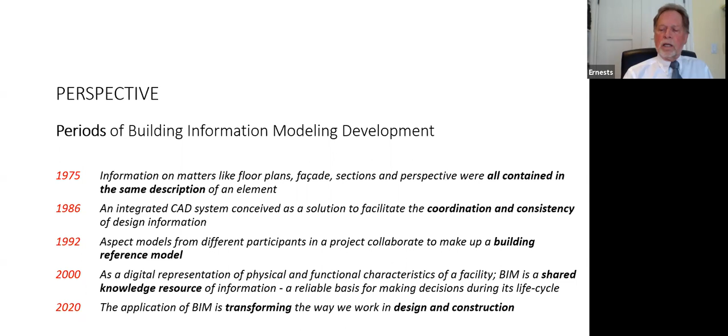Our own office staff at that point had Revit up on our computers. We were developing models of the projects we had in process, and for the first time we had shared knowledge, a resource of information, and a reliable basis for making decisions throughout the life cycle of the buildings we were designing. So by 2020, today, the application of BIM is transforming the way we work in design and construction.

Values again have to do with the benefits available in the world of virtual design and construction. Just to highlight a couple: quality control, focused identity of issues, alignment of documentation and models across disciplines, coordination between disciplines in a way never available to us before, and a whole different level of efficiency for project delivery.

Another value or benefit is the bringing forward of lean principles of construction. Again, decades past, these principles were established. They've been in action and application, improving workplace efficiency where applied.

There are five principles I wanted to highlight. They have names for each, but the first is defining value, which really focuses on what the customer wants, the common purpose - why are we here, what are we building, and how can we bring the greatest value to the process?

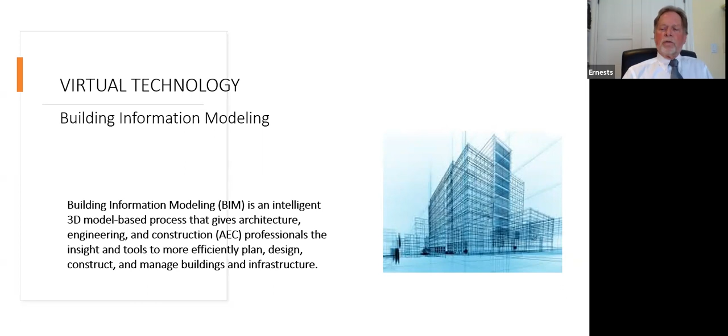This is a shift now from the values to the technology, and technology I call is really tools. One of the great tools we have developed and have available is building information modeling. What an incredible aspect of our modern world BIM has brought to us, with the invention and application of BIM as an intelligent three-dimensional model-based process that gives architecture, engineering, and construction professionals the insight and tools to more efficiently plan, design, construct, and manage buildings and infrastructure. It's just awesome, a delight and an opportunity we've never had available to us before in generations past.

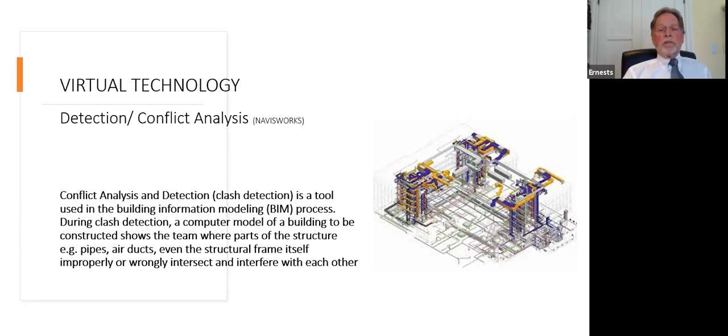Another one of the tools in our quiver now available is conflict analysis, where we can take apart the buildings and look at them in any range of possibilities we choose, and look clearly at how the mechanical system, the plumbing system, and the electrical systems are interfacing, and where a duct is going through a precast post-tension slab, and we can be very clear when there's any conflicts apparent in the virtual building model that we have available now. The computer-based model of the building shows the team players where parts of the structure itself will wrongly intersect and interfere with each other.

The other tool in our tool belt is simulation, which is stepping strongly into a 3- and 4-dimensional world, where the use of the computer to represent dynamic responses of one system by the behavior of another modeled system is significant, apparent, and available now like never before.

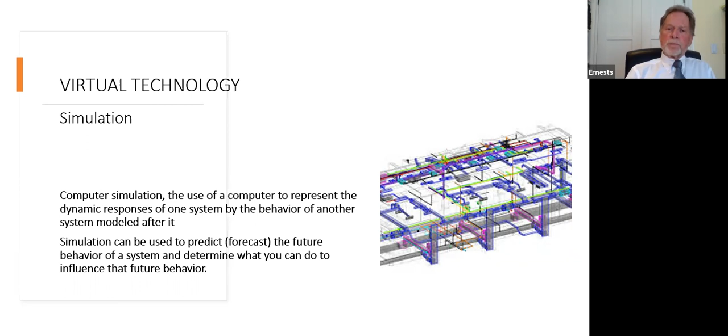Virtual reality, something other architects in our community have put a lot of energy and focus on in the past decade, is related to conveying very detailed information to the design and construction team, as well as clientele, where our clients can now virtually move through a building that hasn't been built yet and choose colors, textures, and volumes in a way that's never been available before.

And augmented reality, the other aspect of virtual reality, is stepping into the world of our next generation of kids and growing-up teenagers now, where the games they play are involved with augmented reality and bring a world that is still on our drawing boards into their presence and into their experiences.

The other item that we're beginning to have a lot of fun with now is fabrication and 3D printing. It'd be wonderful to have a 3D printer in our own office, and we will someday soon.

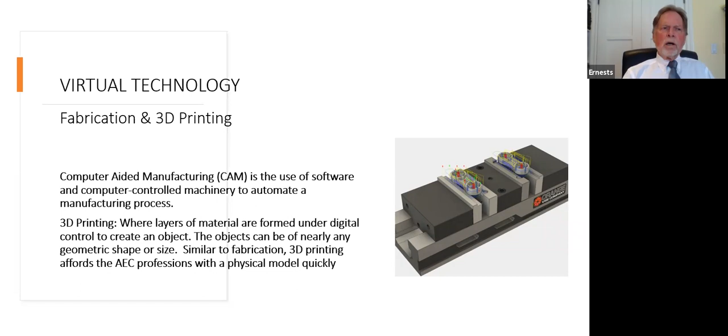This part of virtual technology and tools is related more to the logistics aspect of the construction field. What's important here is the use of software and computer-controlled machinery to automate the erection processes in building construction.

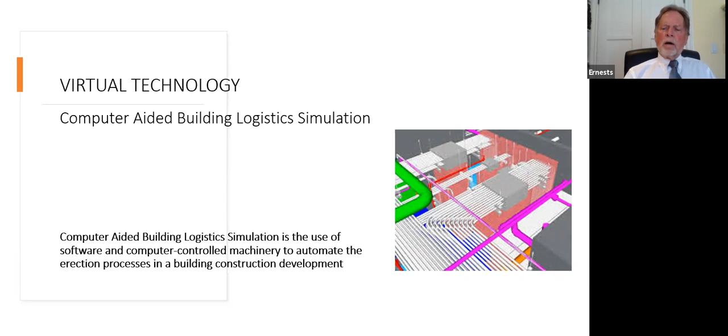From a logistical standpoint, by generating computer simulations of processes, materials, and methods, simulating those ahead of time brings to the field the added opportunity to understand clearly what the challenges and opportunities will be in that logistical process.

A programming breakthrough many decades ago that I became aware of as a very young apprentice architect was the critical path method of construction programming. It's been a tool, an asset, and an opportunity for me throughout my career, and is central to the effective and efficient design, development, and construction portion of project delivery.

A staple of project scheduling used across many industries where time is money. In our office, we've used the critical path method many times to illustrate to clientele what needs to be done and by when, what activities they can expect to be blended with other functions throughout the process. It's really a shorthand for talking about how duration is affected when project variables change.

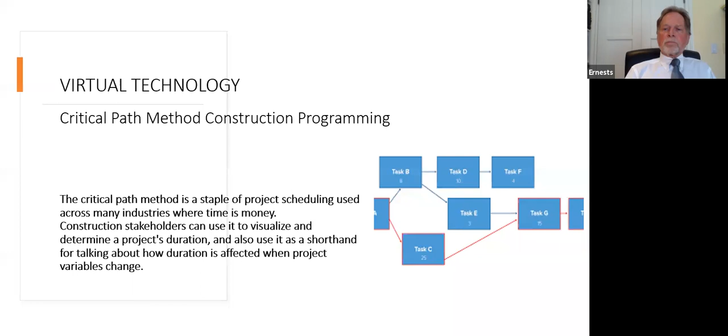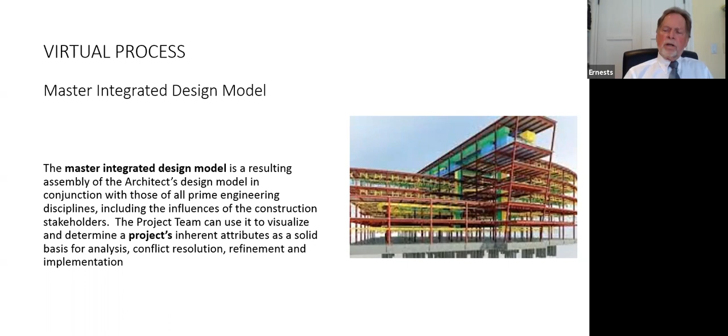It's generally developed in the architect's office by the architectural and engineering team. So it's a resulting assembly of the architect's design model in conjunction with those of all prime engineering disciplines, including the influences of the construction stakeholders. The project team can use it and abuse it as well in visualizing and determining the project's inherent attributes as a solid basis for future analysis, for conflict resolution through the process of design, and refinement and implementation of the design ideas and concepts.

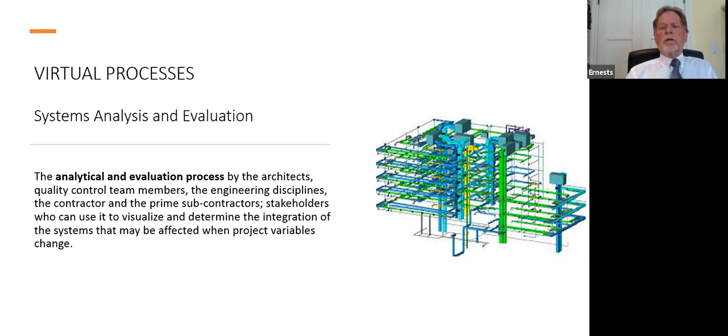Through that process of developing the master model is the analytical and evaluation process by the architects and the quality control team members, the engineering disciplines, the contractor, and even the prime subcontractors, who can use it to visualize and determine the integration of the systems that may be affected when the project variables change. You can see in the diagram how you've got structural components, mechanical components, plumbing moving through, and you can understand how that virtual model, that transparency, has so beneficially influenced the development of design through the design process.

When that analysis is complete at the design level, that integrated management model is possible. The integrated documentation and management model is the combination of two-dimensional contract documents now in relation to the three-dimensional virtual representation of the integrated building systems. And so the application of the model-based design is a process that involves analyzing digital systems representation to facilitate the development of project logistics as the construction, erection, and related decision-making begins to occur.

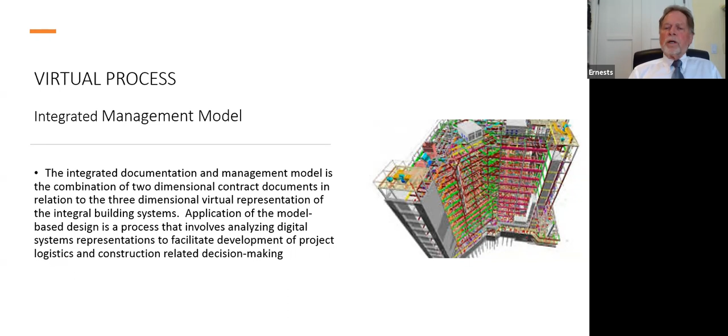So this again, this transparency in the virtual model has incredible use and value to the contractor and all of his prime subcontractors as they analyze, break apart, and begin the prefabrication process in preparation for actual construction and erection on the site.

The prefabrication models - I always use the example of steel, and you can see the steel structure on the right there in that image - where every piece of steel that goes in there is a special, unique piece. They all look the same when you're standing back across the street, but when you're over there in the steel fabricating shop, you see that the end of every piece of steel is a special system of plates, bolts, and welded connections. And you see that the absolute precise length of each piece is carefully prefabricated.

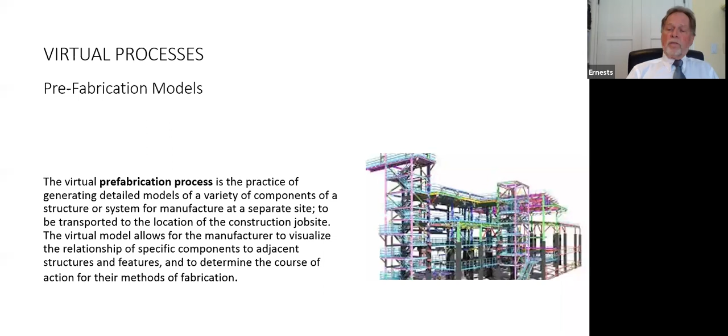So the practice of generating detailed models of a variety of components of a structure or system for manufacture at a separate site is vital to the performance in the field of the logistical connection of all the pieces and the bringing on and erection of the structure. They're located relative to the construction site, and the virtual model allows for the manufacturer to visualize the relationship of what he's up to, what he's doing, to the other adjacent features and structures, to determine the course of right action for their methods of fabrication and ultimate connections.

The opportunity that we have in our virtual world also reaches into the logistics, the site logistics of building these projects, with the construction, erection, and assembly of the parts and pieces and methods of construction come to bear. The application of the management model to the process of construction logistics includes analyzing the interface of equipment, materials, and methods of assembly and erection related to the site and building conditions.

You can see on the right now that we've got plans and models in place, but we're also able to look at what that crane is doing when the truck rolls up. Is logistically everything in order so that truck and that delivery of materials is right on track and right on time and in the right and proper location, so that the factors of project scheduling and integration with the related functions across many industries are accounted for, where again, time is money. The construction stakeholders can use that management model to visualize and determine the effect when project variables change.

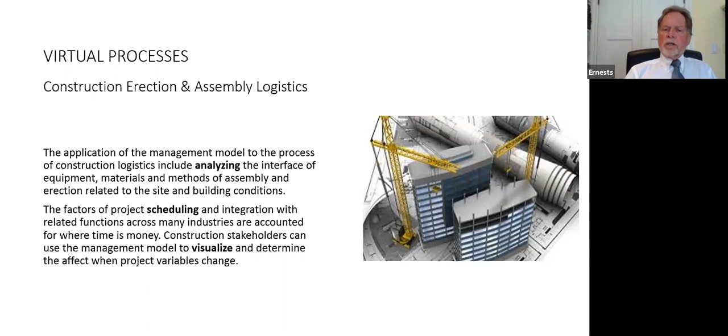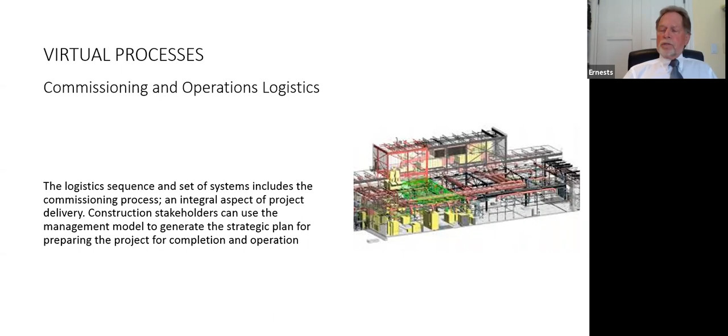As we move forward to the commissioning and operations logistics, where that point between construction and occupancy occur, the commissioning and operations is a vital part of the virtual world as well, where the systems included in the commissioning process are identified. The startup is the beginning of all the systems. The mechanical, plumbing, and electrical are now in process, and the construction stakeholders can manage those aspects of project delivery virtually with a strategic plan for accomplishing each of the construction logistical goals.

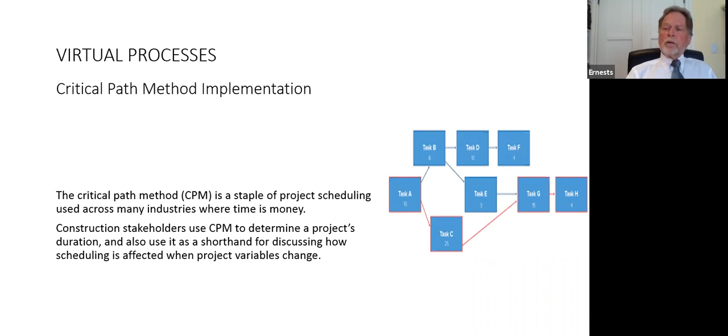Again, the critical path method implementation has been woven through every step of the process of virtual design and construction, and is very apparent where the construction stakeholders are using CPM to determine a project's duration, and to use it as a shorthand for discussing how scheduling is affected when the project variables occur.

The next category of discussion now is services. I'm looking at my watch, and it looks like we're just right on time, about halfway through the presentation, and leaving some time for questions and answers at the end.

So the services are really a combination of services that are integral to the design and construction team members, and they're often applied and used by consultants and consulting team members.

So the first one is BIM implementation, and we recently were involved in a hospital project where existing conditions were very apparent in what was needed for the application of BIM and the coordination of the models on the design side for delivery to the hospital for construction, and then ultimately for their management and long-term involvement with the building, its systems, and potential changes and modifications in the future.

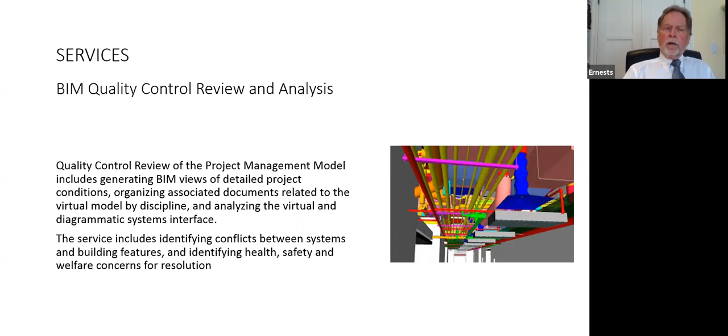So that quality control review part of the process virtually allows us to predict every aspect of potential conflict in the operation, the construction and operation of the future construction site.

BIM coordination of disciplines is another aspect that is close to my heart, since the project leadership brings together the architects, engineers, and professionals from each discipline to produce and manage all information about the project. I think my favorite part of project delivery is when everybody's in the same room and everybody is on purpose with bringing their value, their experience, and their vision together.

in a purpose statement that results in what you see on the right, which is a structure meeting the sky. So the shared models and integrated quality control methods provide transparency among potentially conflicting systems, bring together the conversation in the cohabitation aspect of the construction process, and bring about the resulting smooth and efficient erection and construction of the project.

The conflict analysis part, of course, is the conflict analysis, also called clash detection, where changes in the way in which the project team is enabled to collectively view and understand where conflict may occur and interactively address optional solutions.

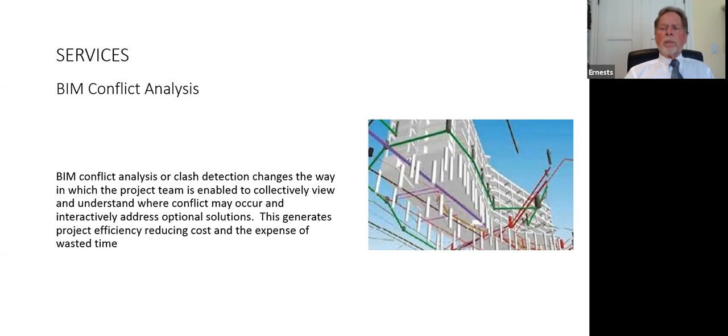We didn't used to have so many options or so many opportunities for looking at potential conflicts in a virtual way and a holistic way where we could generate project efficiencies, reducing costs and the expense of wasted time by pre-predicting where conflicts may occur.

Another tool that's available now, and it's so much a part of what we enjoy as parents and team members as well, is down at the Fun Zone, where animation has provided us with the application of modern logistical management of all of the aspects of trucks rolling up and materials being delivered and cranes lifting parts and pieces into the sky. I mean, we can see all that.

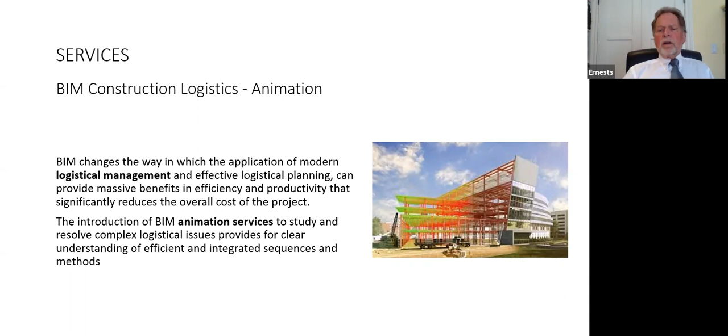We can create an animation of what that logistical aspect of tomorrow's world, what we're going to be up to tomorrow, can be fully animated on the screen today in the office, and we can all jointly look at it and understand how that BIM animation service can resolve complex logistical issues and provide for clear understanding of efficient and integrated sequences and methods out on the site.

Reality capture modeling for construction and logistics is just a vital part that our team, our in-house team, is very aware of and experienced with. It has to do with the capture that provides the basis for building virtual models during construction of conditions where conflict is present or where coordination among systems or components is required.

A good example of that is a condition that we had on a project recently where the 9th floor was supposed to provide access to the roof of a hotel we were working on. And it hadn't been thoroughly thought out in the model. It had been such a small item that nobody cared too much about it. But the roof and the floor of the 9th floor weren't intersecting well.

With a laser scan, we were able to understand what the actual present physical conditions were surrounding all the aspects of that interface of building planes. And there was a conflict present, and the coordination among the systems was required.

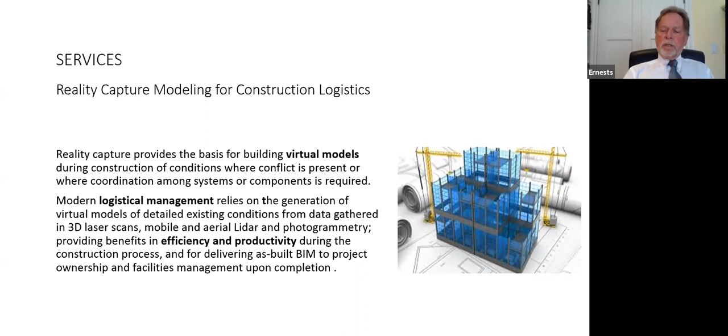And again, the critical path scheduling is just integral with every aspect. It's the shorthand for addressing how duration is affected when project variables change.

I guess the last part of the services is what's now called cohabitation. I first really became aware of that term when I was at the symposium in Washington, D.C. earlier in the year, where the UCI project, UCI design and construction management,

was expressing to the audience how in their project delivery process, they had one floor of a building that was the war room, but it was also where cohabitation occurred, where the team members, each having an important piece of the project, an assembly for the project development, were required to be in the room. The architects were there, the engineers were there, the subcontractors were there, and each piece of the puzzle of project development was central to the conversation.

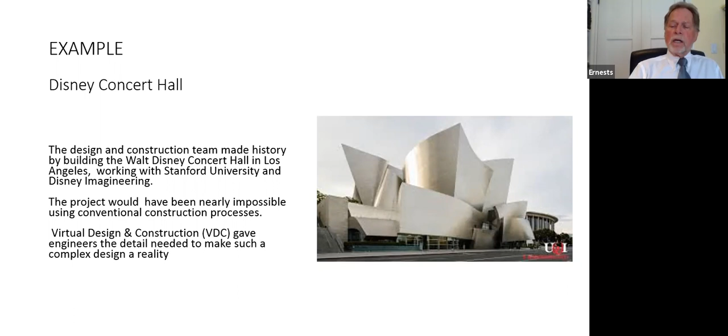Every one of the project prime construction contractors - the design team visualized, analyzed, and communicated the building design through physical and virtual modeling methods. And the result was incredible.

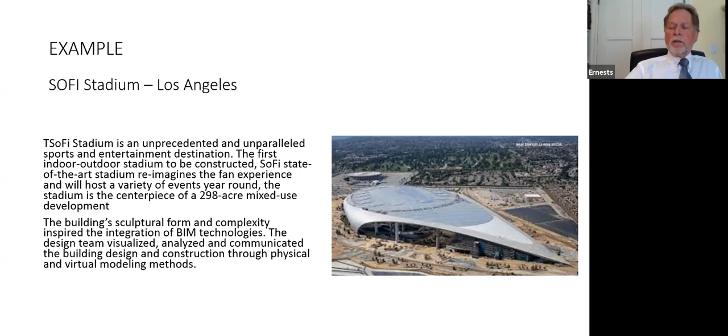I wanted to touch on the influences, and what I really am talking about is the perspective of all the various players that influence professional performance. The conversation is really about professionalism.

It's really about the application of the best tools, the use of our finest minds, the integration of people, materials, visionaries, and hard workers. It's a team effort, and the team leadership still lands in the heart and soul of the architect. Modern architects are adapting now to the changing standards of professional performance.

In the virtual world, the practice for project delivery of architectural projects, history and culture are transformed by embracing the influence of current and developing technology. Delivery through virtual modeling and physical construction has revolutionized the project. Although some architects consider that transformations resulting from integrated virtual project delivery methodology may lessen their role and control of design and construction, there's also the potential that VDC will enhance and increase their influence on the future of project delivery for finer, more robust, more interesting, and potentially more efficient buildings of the future.